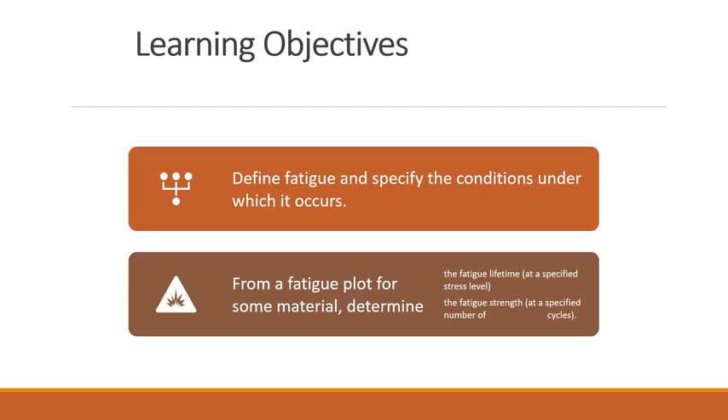Fatigue is a condition at which an object undergoes repeated motion and the object after some time will experience weakness or tiredness. This also occurs in our muscles when we do constant running. After some time we will feel our muscles tired, also known as fatigue.

This phenomenon also occurs in metals. Metals will experience weakness or fracture due to repeated load or repeated stress that we apply to the metals. And this contributes to 90% of mechanical engineering failures. Examples of fatigue in metals include continuous loading and unloading applications, for example, bolts and shafts. They are used in many applications. After continuous loading and unloading, they will experience fatigue.

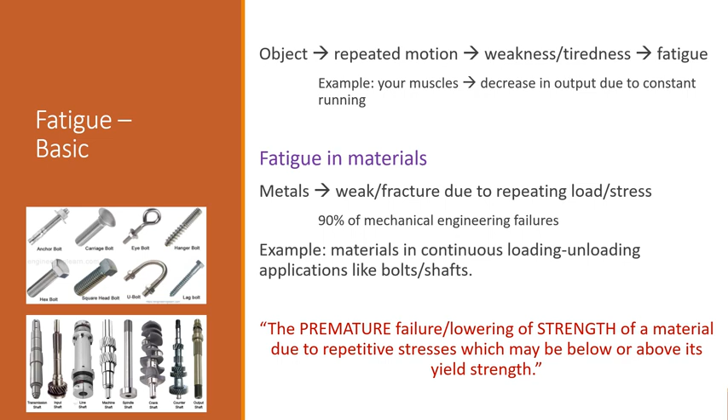So fatigue, we can say, is a premature failure, or lowering of the strength of a material. As we apply repetitive stress, the stress may be below or above its yield strength. After we apply the repeated stress, it will experience fatigue.

Fatigue occurs if these three criteria are met. When stress is applied to the metals, it can be tensile stress or compression stress, and this load is applied repetitively, or we apply this stress continuously, it will later form plastic strain or permanent strain, also known as permanent deformation, and later on it will undergo failure. If tensile stress is applied continuously with cyclic loading, it will later experience plastic strain. So if these three criteria are met, then the material may fail.

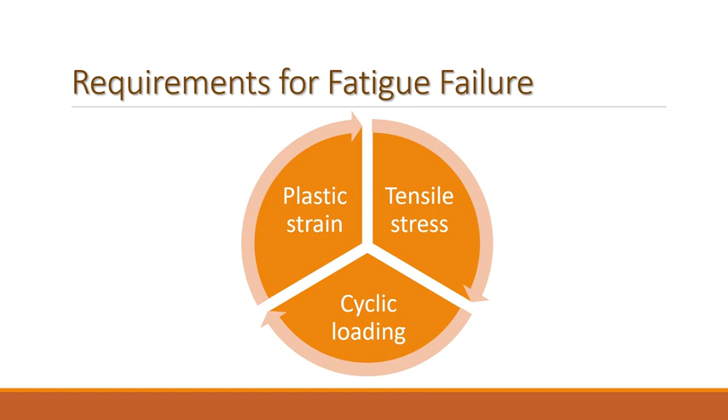The mechanism or process of fatigue occurs in three stages. The process occurs by fatigue crack initiation, where a small crack forms at some point of high stress concentration. Normally this occurs at the surface, where we put the high stress concentration, followed by fatigue crack propagation, in which the crack increases with each stress cycle.

And finally, the final failure, which occurs very rapidly once the crack reaches a critical size. We call it catastrophic rupture. When we look at the image of a fatigue failure, we can see there are two surfaces, smooth and crystalline. The smooth surface is due to the process of initiation and propagation, and the crystalline or rough surface is due to the fast fracture or catastrophic rupture.

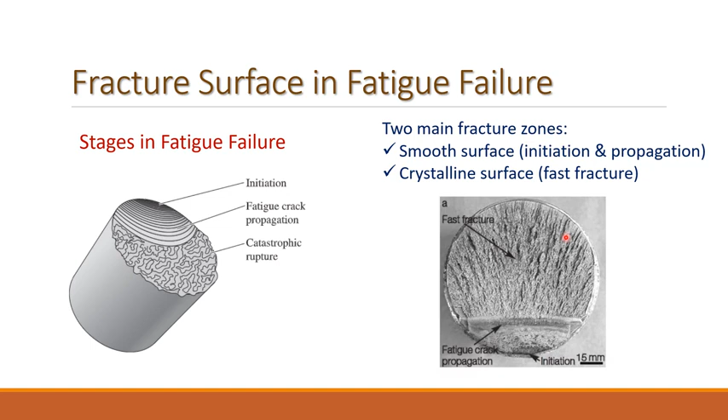The region of a fatigue surface that formed during the crack propagation step can be characterized by two types of marking. One we call clamshell or beach markings, and the other is striation. So this area here is the crack propagation step, and when we enlarge this, we can see the second type of marking, which is striation.

Fatigue striation is a microscopic view, where we can only see these striation markings by using an electron microscope, either SEM or TEM. While beach markings or clamshell markings we can observe with the naked eye. We don't have to use any microscope.

Each striation, this stripe here, represents the distance of a crack during the load cycle. If we again enlarge one of these striations, we can see the distance of the crack as we load with the stress continuously, or in cyclic load.

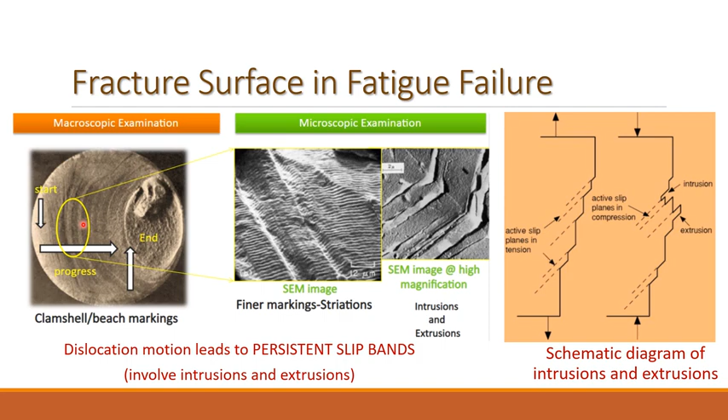This striation consists of intrusion and extrusion. As you can see from this image, the intrusion is where the stripe goes into the metal, and extrusion is due to the crack that occurs out from the metal. That's why from the image of beach markings, we can see one part is a smooth surface and another part is a rough surface, which is due to the presence of intrusions and extrusions from the striation.

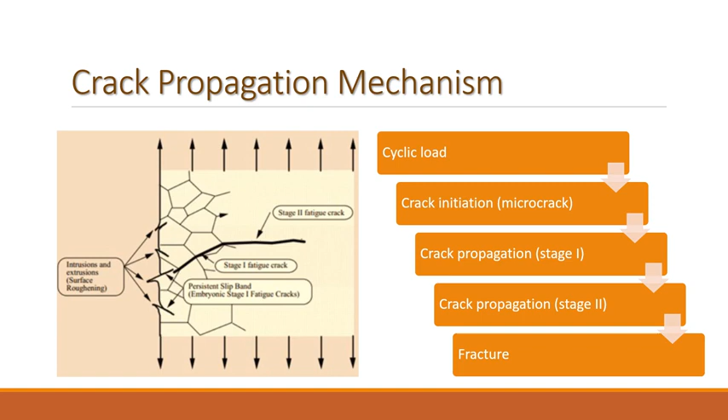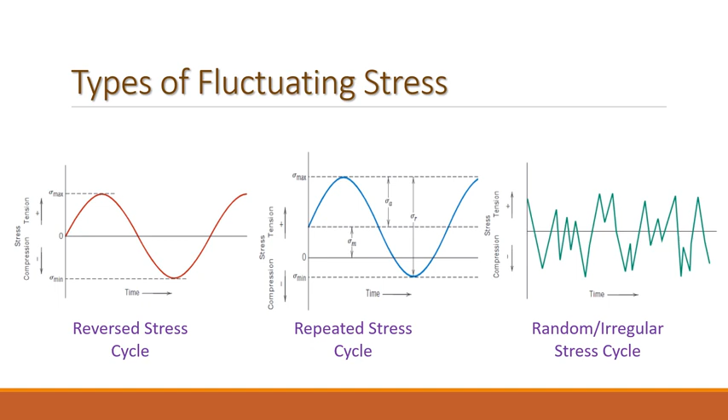Next part, we will be talking about SN curves, which are graphs that show stress as a function of number of cycles. This is done experimentally in the lab to identify the amount of stress a material can handle with several thousands number of cycles, or to identify the number of cycles under a certain amount of stress.

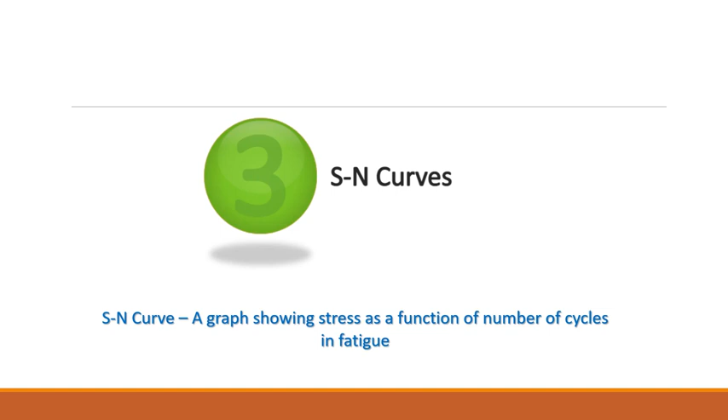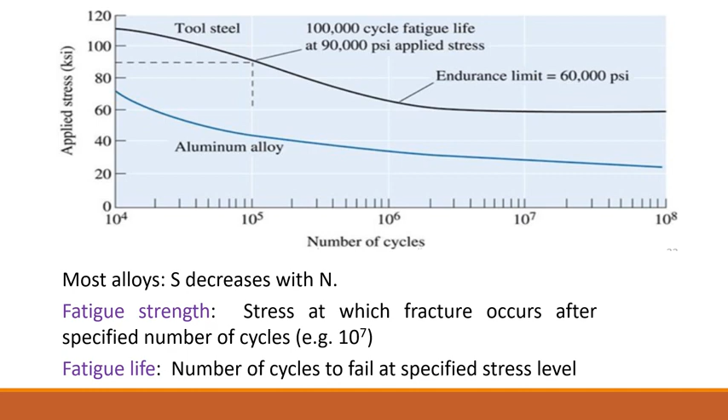When the materials are being used and experience fatigue, there are several factors that will affect the fatigue life. We will be discussing some of them. The first one is the level of stress or the magnitude of the stress applied, and the quality of the surface. This SN curve, stress versus number of cycles, shows the effect of different levels of stress applied to the materials. As we can see, when the stress level is high, the fatigue life is lower than at a much lower level of stress.

In terms of quality of surface, we can improve the quality of our surface material by introducing some procedure. For example, in this case, we applied shot peening, where small shot is applied on the surface of the material, and the effect of this is it improves the fatigue life of the material.

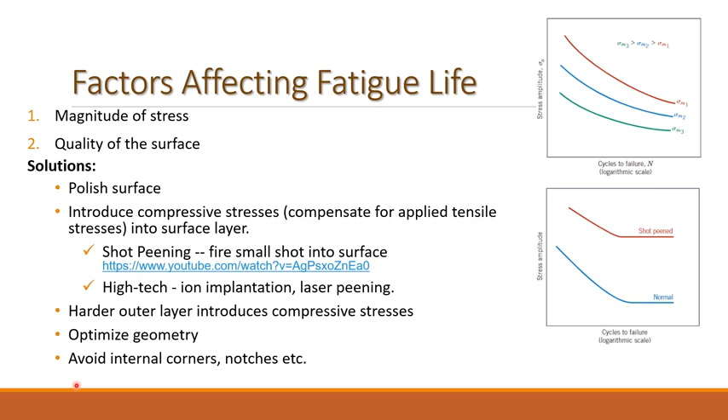And there are several other ways to improve fatigue life, either by making the outer layer of the material harder, or avoiding internal corners or notches, etc. Fatigue life is also influenced by the environment in which the metals or materials are being used. And there are two environmental effects on metals, either thermal fatigue or corrosion fatigue.

Thermal fatigue, for example, a brake disc. The brake disc in our car or motorcycle: we use the brake and it will grip the disc, and if we do this several times, after some time the brake will experience fatigue. So what is thermal fatigue? It's thermal cycling that causes expansion and contraction. We know applying heat will make the metal experience expansion and contraction, and then